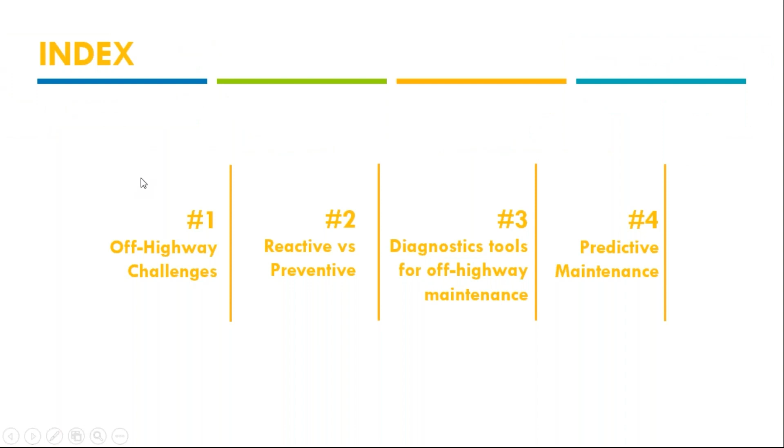So first, we will start checking the new environment that companies in our industry are facing nowadays - how the technology and new systems integrated in the last 10 years have changed the way we repair and maintain our equipment. Second, we will compare reactive maintenance planning with preventive maintenance, which is the maintenance that we recommend to carry out - the better option. After that, we will look at the importance of having a diagnostics tool in our shop to boost that prevention and increase our capabilities.

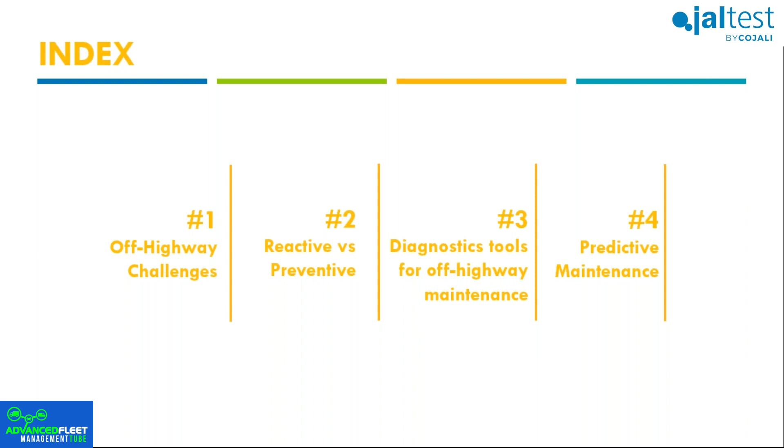Finally, we will see what's coming to the industry - for example, telematic solutions, predictive maintenance, and new software and technologies that we have right now in the industry. So let's start.

So where are we right now? This is the opening question for this webinar. In the last few years, we have seen how our equipment has been changing with new sensor components and systems themselves, like the DPF, the DOC, the SCR - new technology, new system components that have made an impact on maintenance and repair methods. This evolution has also modified the routine checks that technicians and mechanics have to carry out in order to keep the assets working. Everything has become more complex.

We need new knowledge about those components, about those intervals and requirements to keep the machine working and to keep the machine out of derates. For example, as most of you may know, when we are not carrying out maintenance on the DPF and other after-treatment systems, we are going to have a derate - in other words, a downtime.

Requirements have increased in recent years. We need, once again, more knowledge. We need to take care about controlling emissions. We have more electronic components, so we have to learn more about electromechanics, and we have to take care about manufacturer specifications, because every make, every model, and every system is a whole universe of technical data and requirements.

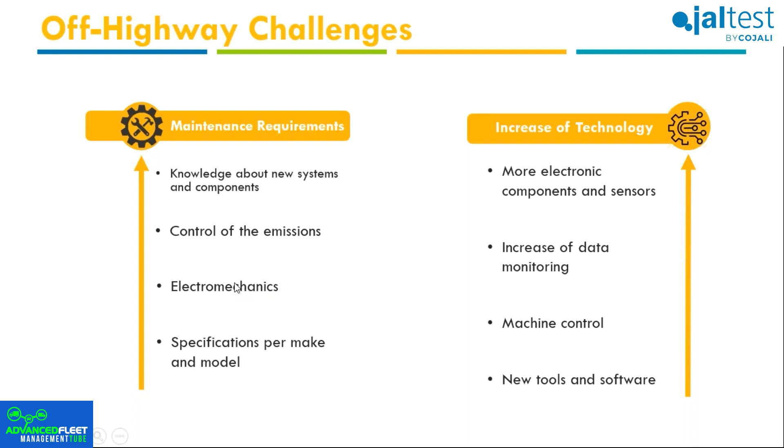So this environment impacts our fleet in the following way: maintenance has become more expensive and more complex, with manufacturer specifications, with electromechanics, with less freedom, because we are going to need tools, we are going to need OEM services, we are going to need an extra hand on our repairs and maintenance. So for fleets and off-highway shops, downtimes have increased.

Also, we are going to need more parts and components for doing the maintenance and repairs. We have to take care of that control over emissions, and we need to be more efficient. So this environment is a little bit complex.

Many companies that are not being prepared for this new world of doing maintenance and repair of assets, well, they are losing money, losing time, depending on third parties, and at the end of the day, not having the control they need to keep their fleets working.

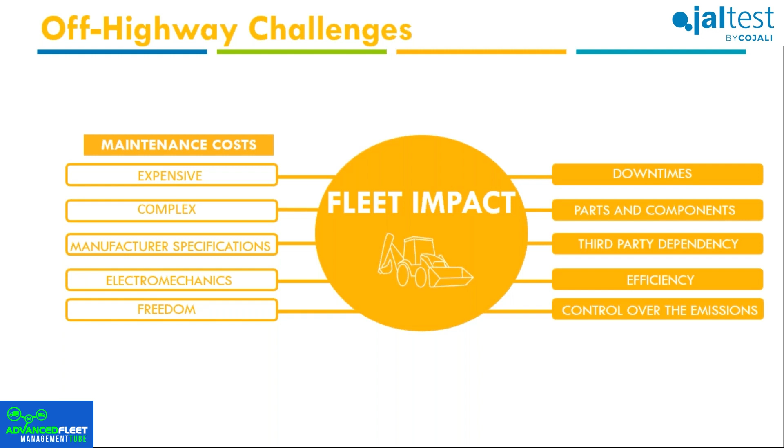So there are two scenarios in the ways that we are repairing and taking care of our machines. The first one that we are going to see is the reactive maintenance, which unfortunately is still one of the most used in the United States.

So it's important to do this exercise of education, to let companies know that right now there are solutions and ways to work more efficiently.

So the cost of owning a machine, a single construction vehicle, goes from $35,000 to $80,000, excluding the price of the machine itself.

In this average price, we are taking care of only four elements of expense: the cost of working and operational expense. So, for example, the workers, the transportation, the parking, the fuel, etc.

The maintenance cost as well, and then the spare part cost for repairs and changes, like for example filters, belts, replacement, etc. It's important to highlight these four expenses we've talked about.

If we put aside the cost of working, which is going to be the most expensive one, and we only compare how much a maintenance plan costs versus spare parts, repairs, service outside of our shop, etc.

It's important to highlight that repairs are always more expensive than maintenance, not just because of the price, but because of the time.

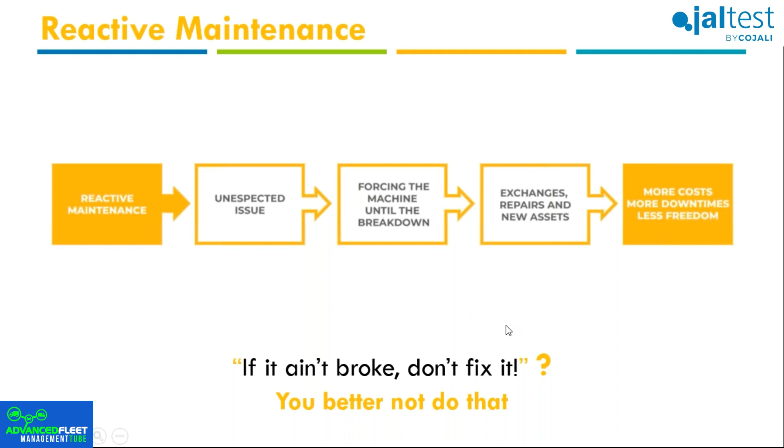So the second option we have, instead of doing reactive maintenance, the alternative we propose, is going to be easy: a planification. Preventive maintenance is a planification.

It's the care, servicing, and periodic inspection for the purpose of maintaining equipment in satisfactory operating condition by providing systematic inspection, detection, and correction of deficiencies.

So doing a planification, checking daily and weekly our assets, we are going to save a lot of money in spare parts, repairs, etc.

How we can perform this maintenance is easy: we only have to follow the technical specifications that the OEM recommends. That means the maintenance intervals, and we should perform diagnostic scans regularly to identify problems earlier.

Every system has specific information, specific things that we have to take care of.

So for example, we are going to have maintenance intervals for engines, for transmissions, for the after-treatment, for the attachment, etc. And we're usually going to need a diagnostics tool for every manufacturer, for every system, if we want to take care of all of them.

So it's important to keep in mind that in order to be able to control those ECMs that are sending us that information, which is very precious to carry out the preventive maintenance, we are going to need a tool.

We are going to need hardware that can talk with them. This is very important.

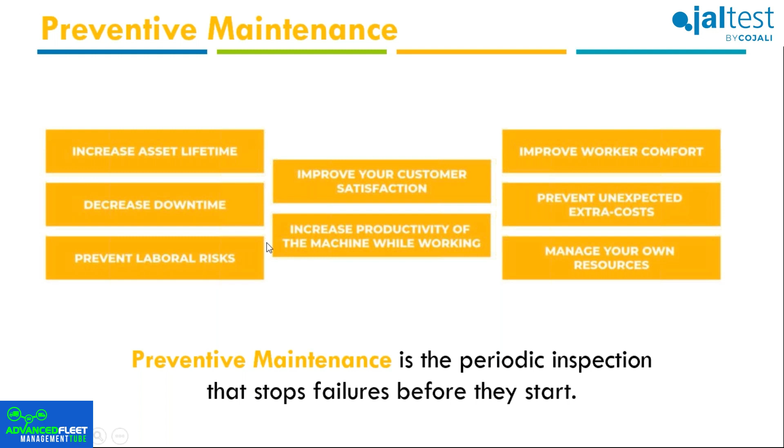So it is important that even if we think we are saving money because we are not doing maintenance—and I'm not talking only about checking the oil or the belts, which is basic maintenance that many companies take care of—but also about doing diagnostics, monitoring the data that the ECMs display to us, and having access weekly to the maintenance intervals the manufacturer recommends. If we are not taking care of that, our scenario can become a nightmare, because we are going to have a surprise every week. We are going to have downtimes, we are going to have derates because of the after treatment, etc.

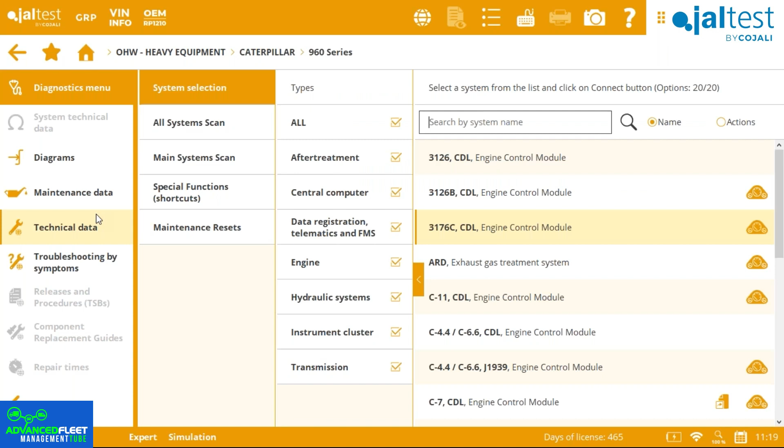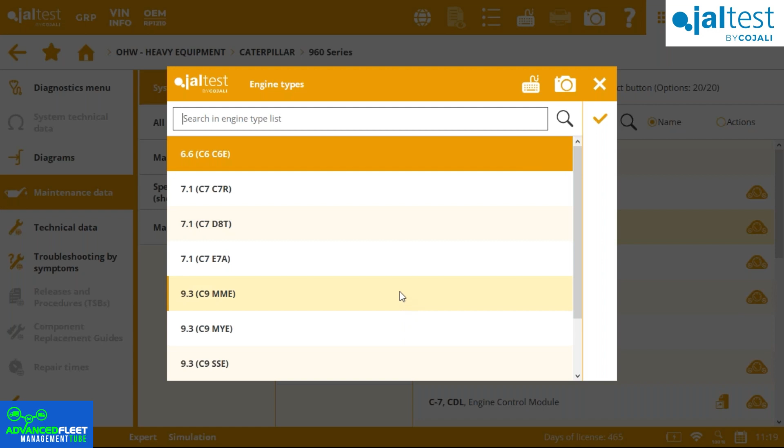From the main screen in the software, if we want to check this service information for that particular Caterpillar wheel loader, we click on heavy equipment, then Caterpillar, and select the 960 series. Then we go to maintenance data, which is where we find all this information. Here we just need to pick the engine type that we have. Let's imagine we have this one, and then we access the information related to the different intervals.

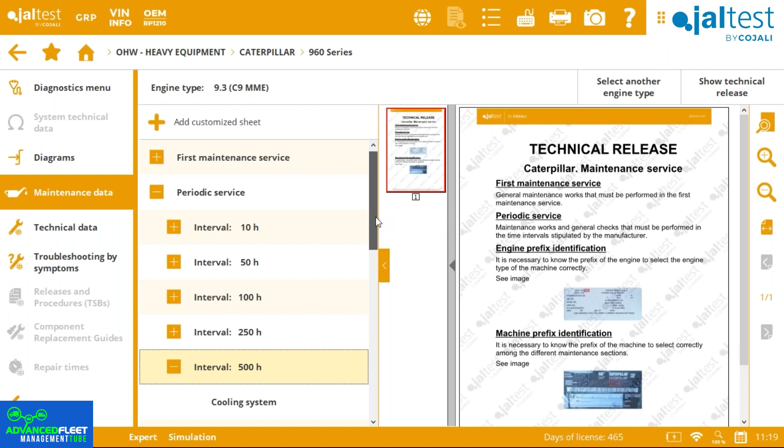If you remember, we said this particular machine was at around 430 hours. So as you can see, the next interval is set at 500 hours. If you click here to check what has to be done on the engine side, there are different things. But as you can see, it's not just the engine—there are different things related to different systems, like hydraulics, transmissions, and so on.

If we focus on the engine, we can see different things that have to be checked or changed—for example, changing the oil and oil filter, alternator belts, and so on. Let's go here to check what type of information we find. For sure the mechanic is going to need information about what type of oil to use, how much they're going to need, and what the viscosity should be.

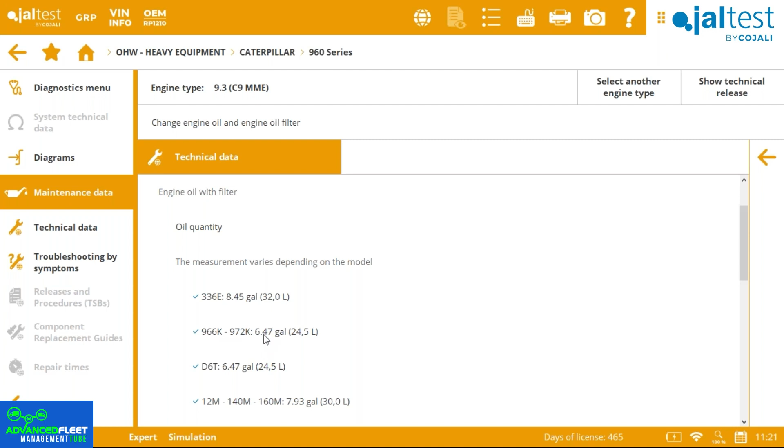Jaltest, in this case, is going to provide information about the quantity according to the different models. We need to take a look here—we know we exactly need 6.47 gallons according to the manufacturer, in this case Caterpillar, and we also have information about the oil viscosity. So there's good information there.

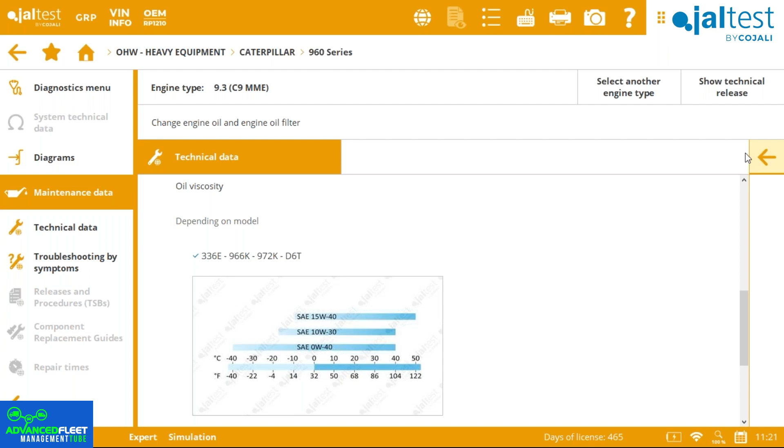Let's get back. We can see more things that need to be done here. In addition, we need to clean the fuel tank filter, and we need to change the primary and secondary fuel filters. Also, sometimes whenever we do this oil maintenance, we need to perform a reset, and for that we sometimes need to use a diagnostic solution. So that's another reason why these diagnostic solutions relate to preventive maintenance. That was just one example.

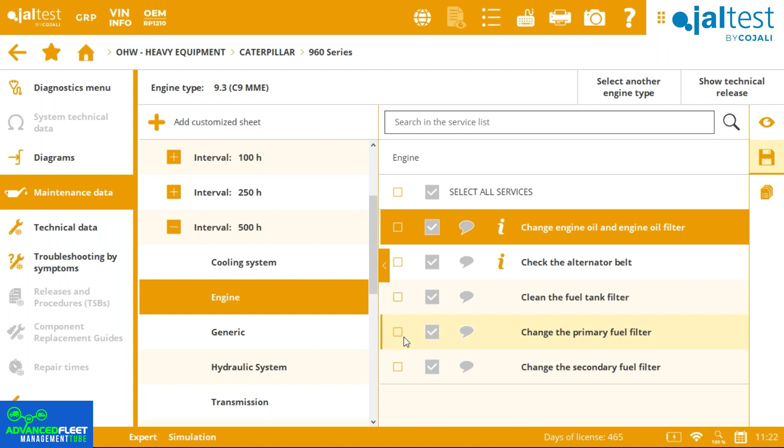Let's imagine now that we're working on Volvo heavy equipment, in this case another wheel loader that already has 500 hours of work. But by that time, following Volvo's recommendations, a diesel particulate filter service has to be performed. If we go here, we can check that. Let's go to Volvo now.

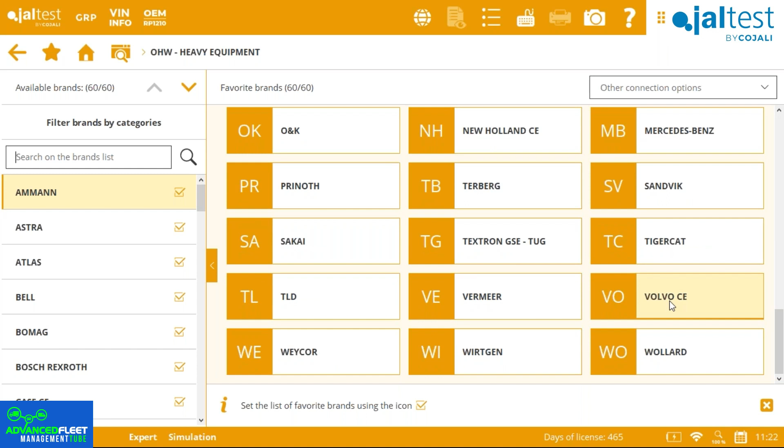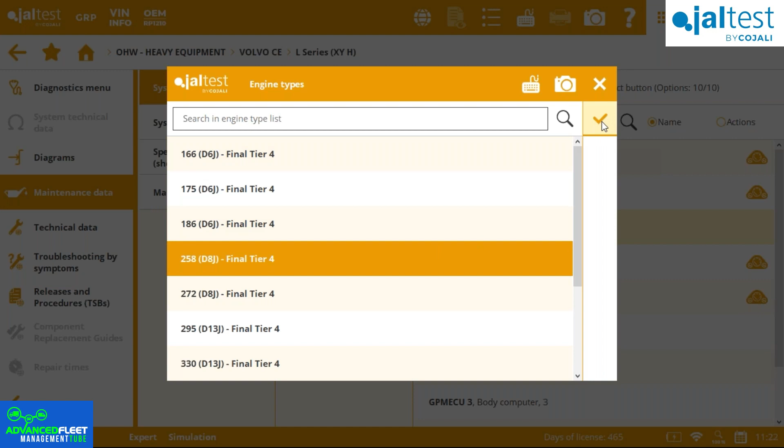As you can see here, we can find all the different brands included in off-highway. We go to Volvo, then L series, and pick the one related to our model. Then we go to maintenance data again, which is always where you'll find this information. In this screen, we just need to pick our engine configuration—in this case, this version of the Final Tier 4.

We want to check what has to be done at 500 hours or after 500 hours related to the exhaust gases after-treatment system. As you can see, at this particular moment we will need to carry out a diesel particulate filter regeneration.

We know this usually ends with calling a third party that has the capabilities or technical resources to do that. So what about having the resources to do it ourselves, in our own shop? And not just that—what about having each particular interval tell us exactly what to be done, with all the information, and having access to these particular actions, like in this case the particulate filter regeneration, which we can just perform from here, from the software.

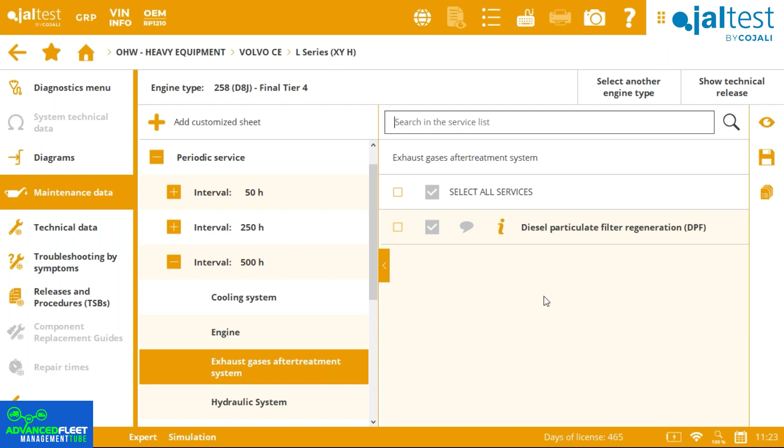All right, so I'm going to get back to the presentation.

We're going to continue here. We've seen just a few examples, like vehicle service data resets or DPF regenerations. All of them are directly related to preventive maintenance, and all of them are accessible thanks to diagnostic solutions.

We could bring many other examples for which a diagnostic solution can be useful, such as the calibration of the powertrain system, which is extremely recommended when we modify or replace any component, or when we want to avoid malfunctions like noises and vibrations. The goal of this powertrain calibration is to keep the dozer performing smoothly—something very important if, for example, we're building roads with the dozer and need to synchronize both tracks to keep moving perfectly straight. Other examples include calibration of the hydraulics, calibration of the attachments, or the reset of the pressure relief valve.

In addition to these examples, the top diagnostic solutions in the market offer technical service bulletins regarding different procedures released from time to time by manufacturers. For example, I remember one related to the rings of the AdBlue or DEF metering module of the SCR treatment system, present in some Mercedes-Benz stationary engines. Thanks to this TSB integrated in Jaltest, or any diagnostic solution, the mechanic or technician knows how to proceed just by following the steps provided by Mercedes-Benz.

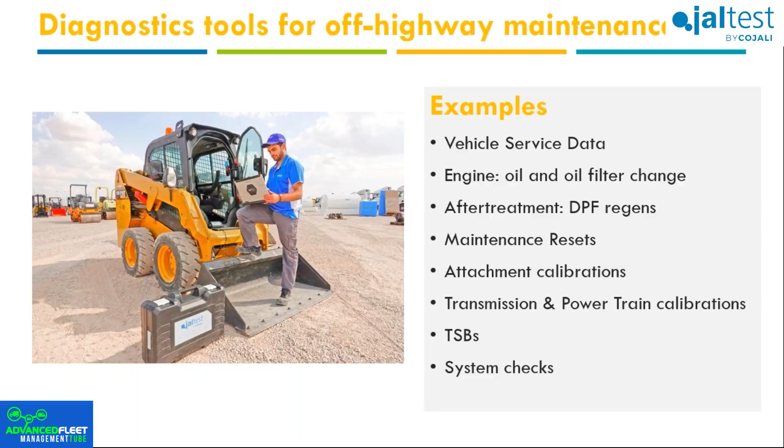So we go now to the last part of the presentation, which is predictive maintenance. It seems clear that, at least these days, preventive maintenance is the most generalized strategy in the industry for ensuring the good health of equipment and extending its useful life. But what is next? What could we expect for the near future? Well, we all know that the world of maintenance is in permanent change, constant evolution, improving day by day, and it does it faster than ever before. That is how it is.

It looks like we won't have to wait long until a new generation of maintenance becomes mainstream in the repair industry. In fact, we are already fully immersed in what is known as the fourth industrial revolution, also called the 4.0 or simply the data revolution. The 4.0 revolution is affecting not just this industry, but the rest of the industries too. And of course, heavy equipment, as I said, is not an exception.

This new era is based on three main pillars that you see on the screen. The first is the sensors. The second is mass data storage. And the third pillar is artificial intelligence.

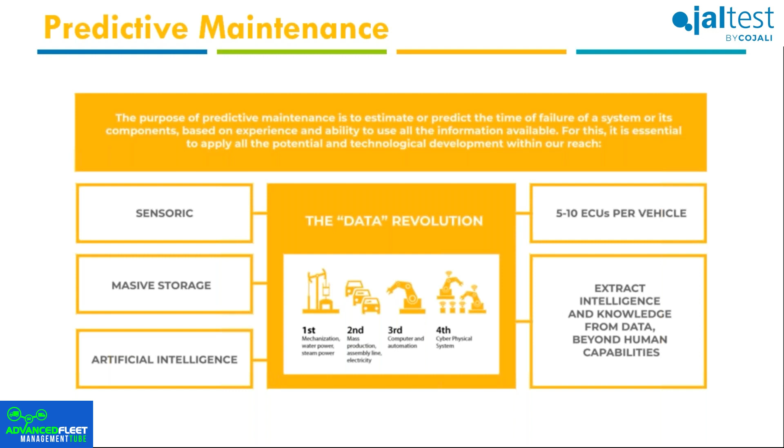So the question here is: why not take advantage of today's technology and use it to take our preventive maintenance to the next level? Why not go further than just regular or periodic checks by incorporating a prediction component that helps in the definition and development of our maintenance plan?

Okay, let's sum up for a second, because it's important to understand where the repair industry is coming from, where it is right now, and what the future direction is. Jorge has already explained this a few minutes ago. So to sum up, we can agree that at this moment, preventive maintenance is probably the most commonly adopted method between the different strategies or approaches. However, it has not always been like this.

This type of maintenance or strategy is the natural evolution of corrective, or reactive, maintenance—the philosophy that basically says run it until it breaks. We all know how that finishes.

The future, and I'd say even the present, of the repair industry is necessarily linked to data monitoring and data analysis. Today's technology allows the gathering of information. Thanks to diagnostics and telematics applications, we can now monitor the health status of equipment in real time. We can check performance and even gather mechanical data—things like fuel consumption, emission levels, engine RPM, speeds, and temperatures for oil, transmission, and brakes, as well as tire pressures, and much more.

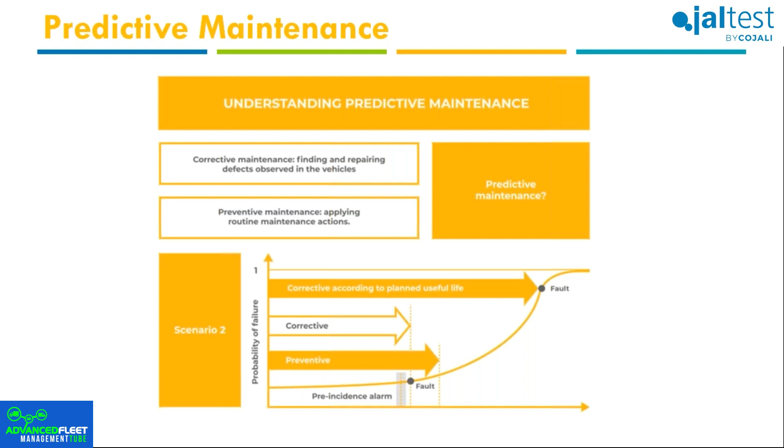What seems clear is that diagnostics and telematics applications are essential in this process, because thanks to them we can evaluate the present or predefined conditions of specific pieces of our equipment and take that useful information into consideration when establishing our company's maintenance plans.

Not only that, but the most advanced solutions on the market will allow mechanics to even perform advanced functionalities like DPF regens, resets, and many other system checks remotely. That saves companies a lot of money and time in service and maintenance—in other words, it's something that changes the approach and allows companies to reach the highest possible levels of efficiency in their activities.

So the reality is that the maintenance world is becoming something global and something more remote every day.

We're going to finish off the webinar with a recommendation for anyone involved in the repair of off-highway equipment of any kind, and for anyone wanting to be prepared for the present, but also for the future challenges and needs of the repair industry. So the recommendation is that having access to a complete diagnostic solution will definitely help and contribute to fulfilling preventive and predictive maintenance strategies, especially for those of you handling different makes and models in your shop who want to be able to work on all of them.

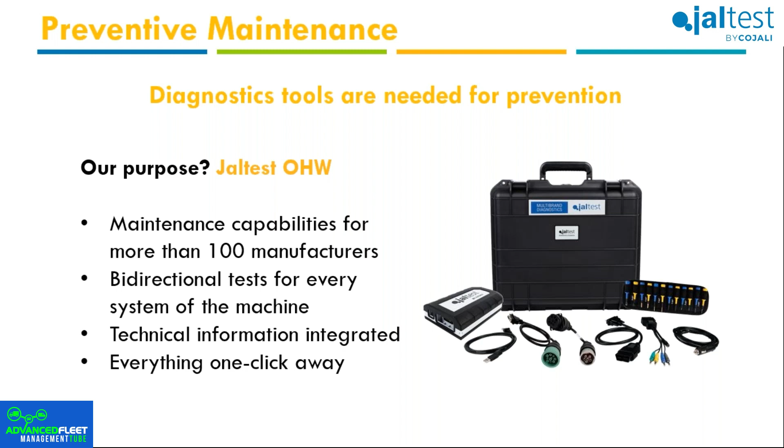So a diagnostic solution like, for example, Jaltest Diagnostics, where you can have all this coverage in just one platform with all the technical information, is going to be key.